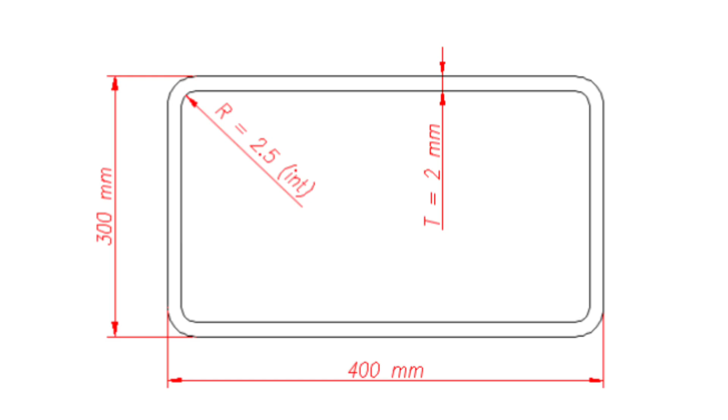Hi, this is Jay from caldereriaonline.com, and I will show you how to unfold a rectangular pipe in several different ways using caldereriaonline.com tools. So the pipe is 400 by 300 external dimensions, 2 millimeters thickness, 2.5 millimeters internal radius, that is 4.5 millimeters external radius, and let's say a height of 350.

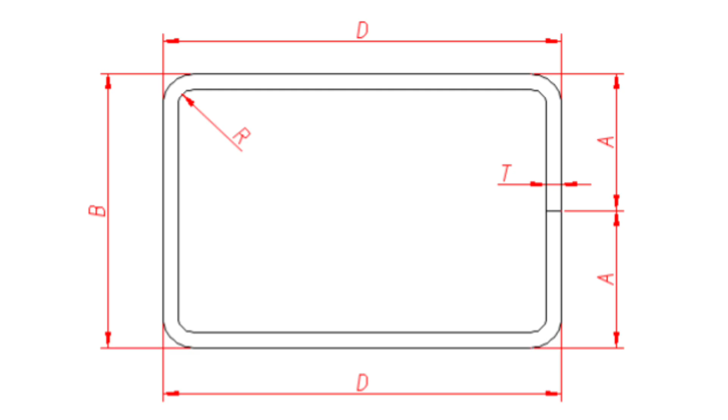So let's go to the first way. I will use this C profile. So the idea is to have this A dimension so that we have a butt joint here. So this is 150 two times to have 300. We have 300 here, 400 for the width, 2.5 for the internal radius, as you will see on the image. Thickness was 2 millimeters, 350 here.

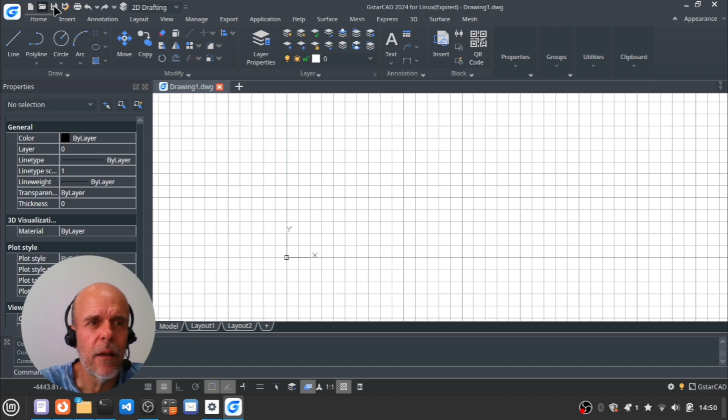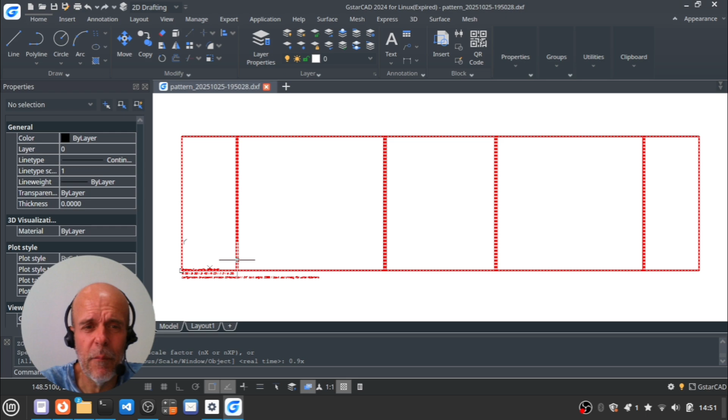I calculate the pattern. We have the developed length here and the bending lines as shown here. So I download this and we see this in my CAD. So here in my CAD, I will open this download. And we have this is the overall length and the bending areas here. We can see the detail.

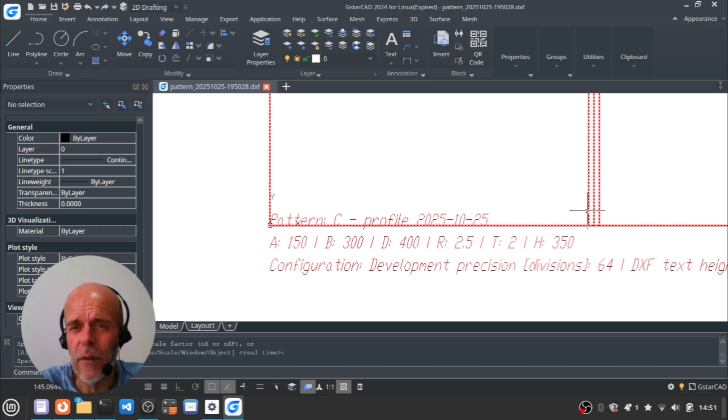So this is the bending line and this area from one line and the other. In the middle we have the bending line. This area is the actual place where the bending happens. So this from here to the border is flat, as well as from here to the next line.

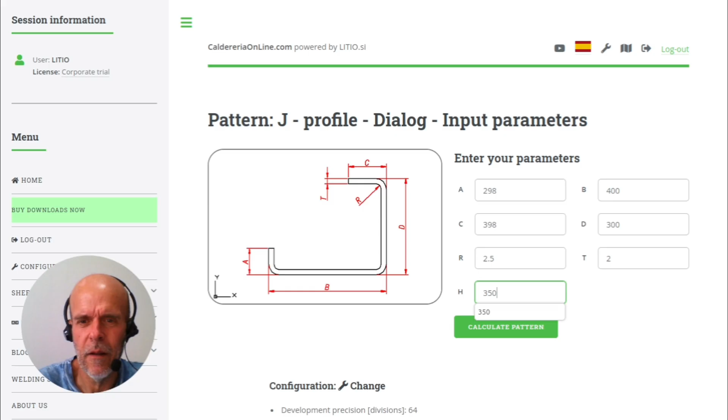Let's go to the second method. So the second way I will be using is by using the J profile. We will have both flanges C and A going up to a point to have a corner joint. So I enter the dimensions. I calculate the pattern. So we have the developed length, which is the same. This is good news. And we have these bending lines. I download this, and since it's very similar to the other, no need to check this on my CAD.

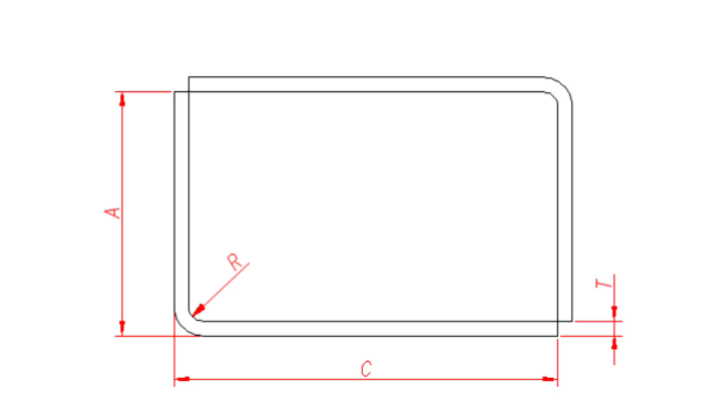Another way to do this pipe is by joining two L profiles together. So I will be doing this case too. I calculate this. So here we have half of the pipe. Again, I download this and continue with the next method.

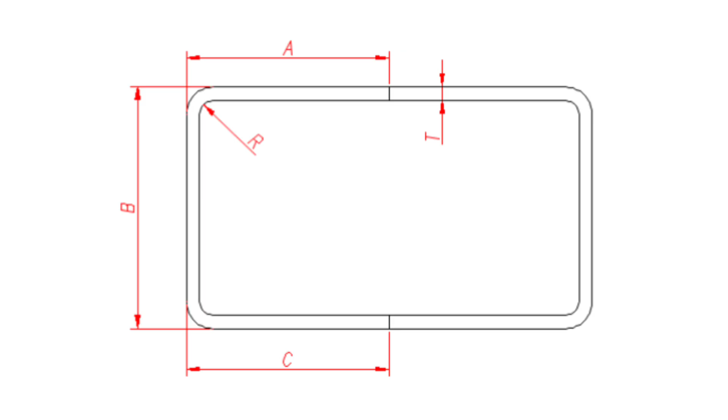For the next method, I will be using the U profile, and in this case, I will consider the pipe being made by two U profiles arranged in a box configuration. So I will enter this value. So here we have 200 up to the half of the pipe. B will be 300. Again, C 200, 2.5 for the internal radius, thickness 2 here,

350. I calculate this pattern again, and we see this is half of the original length we have already calculated for the other cases. That was 1384. Again, I will just download this and continue with the next case.

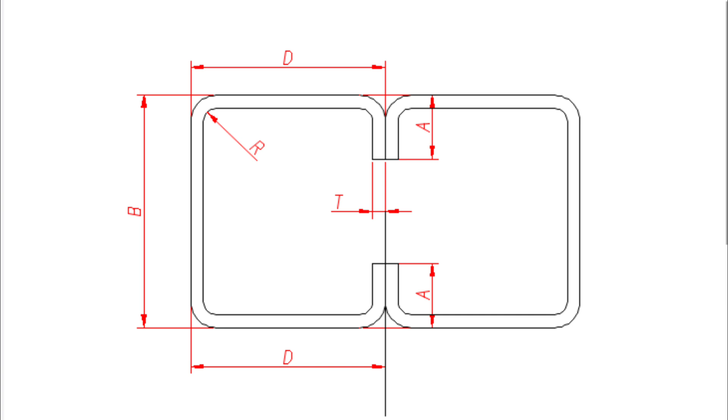To finish with the profile cases, I will use two C profiles placed flange to flange to form a rectangular duct. So I will have this A, imagine this being the half of the pipe, this line here, and I will have two adjoining C profiles to form a pipe.

So here I will have, I can have 15 here. It's just the size of the flange. That is not important. 300, 200 here, 2.5 as usual, 2 here, 350. I'll calculate this pattern. I will download this and continue with the next case.

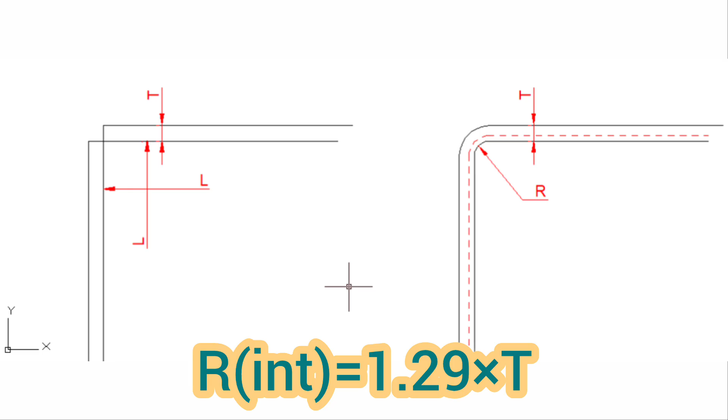For this case, I will be using this one, which is the hopper, and I will input the same dimensions in the bottom and the top ends, and the offsets here, the X and Y offset, I will make them 0. Here it is important to consider that input measurements are internal, and the bending lines can be considered both seams or bending radius if the internal radius is 1.29 the thickness. For a thickness of 2 millimeters, I will consider an internal radius of 2.5,

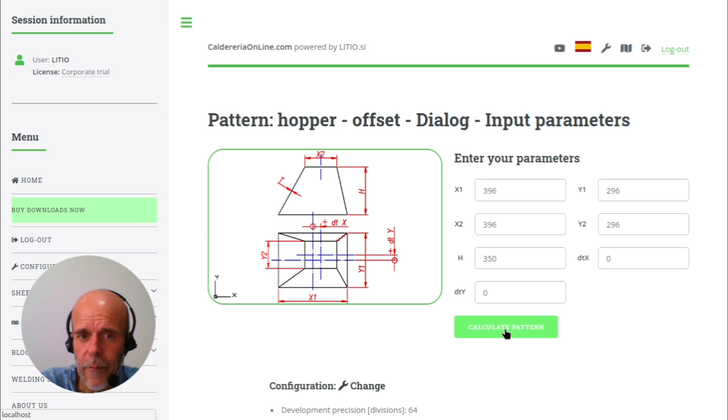which is quite a good approximation. So X1 is 396. This is internal dimensions. Y 296. Again 396, 296 here, 350. Here we have 0, so this will give us a centered pipe. I calculate the pattern. We have the preview, which is a rectangle, and I download this and we check this in my CAD.

So here I am in my CAD. I will open the last download, which is this one. And so we have this is the box or a pipe. And if we check distances, we will see this is 1384. And we can have these lines here as bending lines or as cutting lines, and placing these to form corner joints as I show on screen.

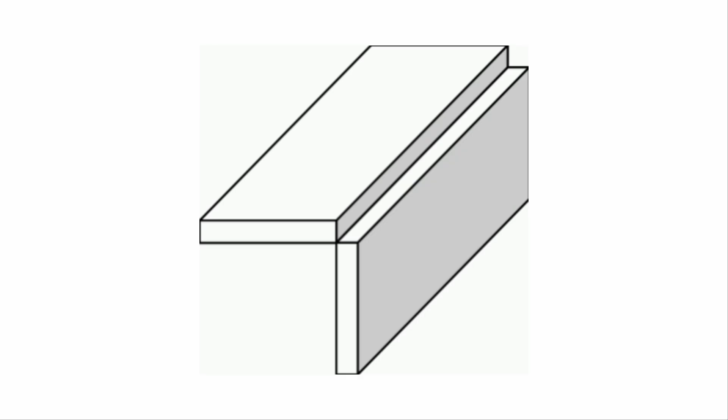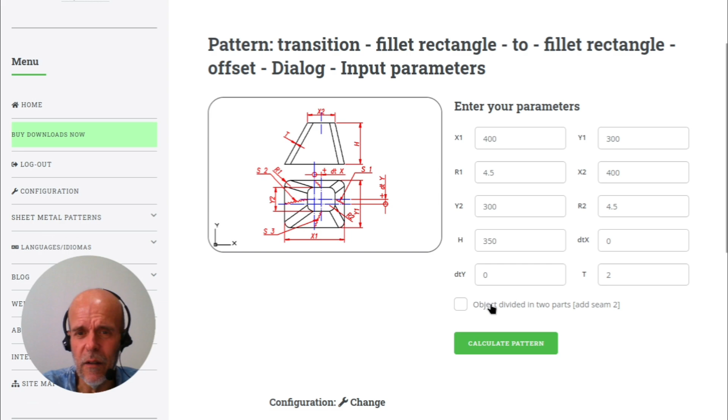Finally, I will be considering this case, and this is okay. We have external dimensions, so I just enter external dimensions. 4.5 is the radius. We have 400 again here and 300 on the top. This is the same. H 350, no offsets. 2 is the thickness. I will consider this in one part, so we will have one seam only here. I'll calculate this. Again, the outlook is like a rectangle. I download this and we check this in my CAD.

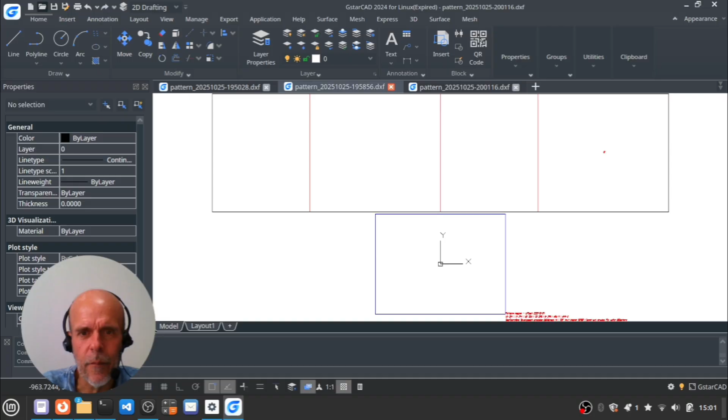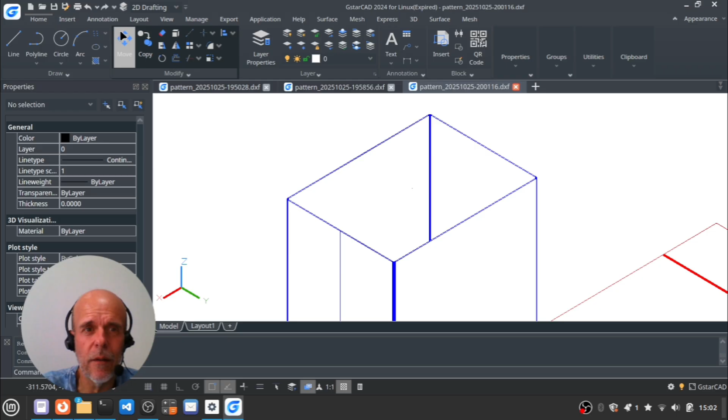So here I am in my CAD. I will open the last download, which is this one. We can see in 3D. So here it is, our transition or pipe. So this is it. Back to plan view. I will take the distances here. And again, we have 1384. So these were 7 different ways of unfolding a rectangular pipe.